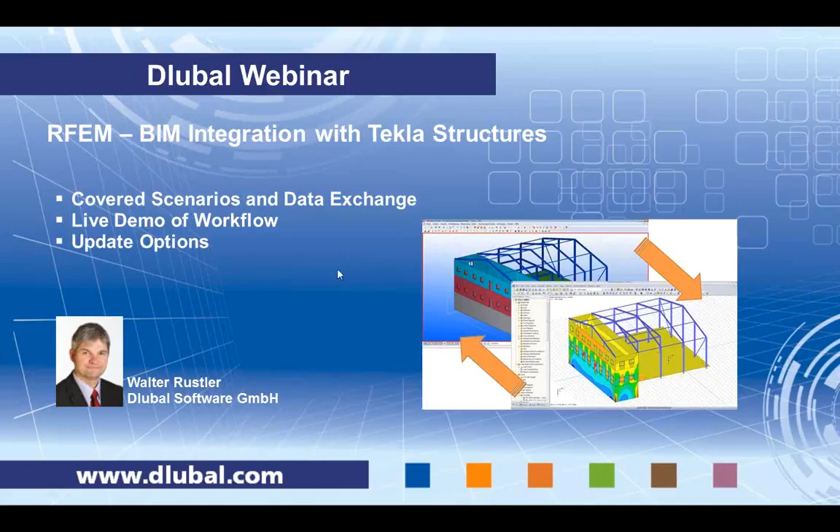So we are not limited to the generic definitions of a file-based interface, and we can pick, read and write all the properties of each object inside both applications, as long as they are supported by this API that both programs have. So in a sense, it gives us more specific options to import and export data and to directly connect the objects in both applications. It is a bidirectional interface with update options, and it works in a 32-bit and a 64-bit environment.

We can distinguish between a physical model and an analytical model, and it is important to know the difference. In general, when you work in an architectural program or a CAD application, you basically model the structure as you would build it later. When you do an analysis, you make a more simplified model that doesn't include all objects, like, for example, door frames, window frames, and other non-load carrying parts. Therefore, we have to make a difference between the physical and the analytical model.

And in general, there are some problems when you work with a physical model in a structural analysis program, because, for example, a beam might be cut off at the edge of a column, and therefore there is a gap between the center line of the column and the end of the beam. So in the analytical model, we have to overcome this gap and provide a connection, basically bring together all load-carrying parts in one structural wireframe model. And it's a mechanically correct model that includes 1D members like columns, beams, or bracings. It may include walls, slabs, or other surfaces.

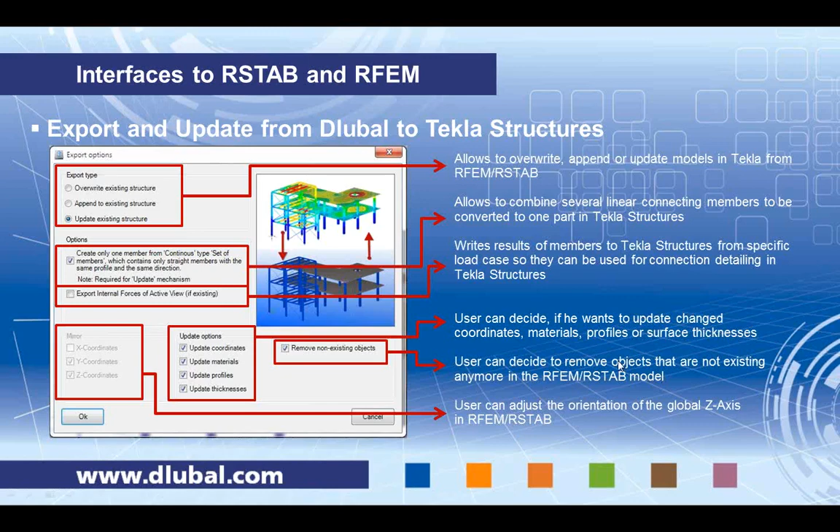Additionally, we transfer information like the node numbering of the Dlubal analytical nodes or the material or set of member numbering. So you can find the parts that you see in RFEM also in Tekla Structures. By inquiring the objects, you will find there, okay, member number 235 in Dlubal, this is what I have here now. And I can go to the Dlubal model and see, okay, where is member number 235?

All those user attributes can also be displayed on a drawing, for example. So it would be a good way to use it for an overview plan that displays the numbering of the structural objects maybe, or whatever you need it for. Anyway, we can update the Tekla model with grid lines, with information about the used materials, and also the node numbering, and additionally comments. That means I can write there, for example, this is a new beam, and then this comment will be also there as a user-defined attribute, which you can use then for filtering inside Tekla and so on.

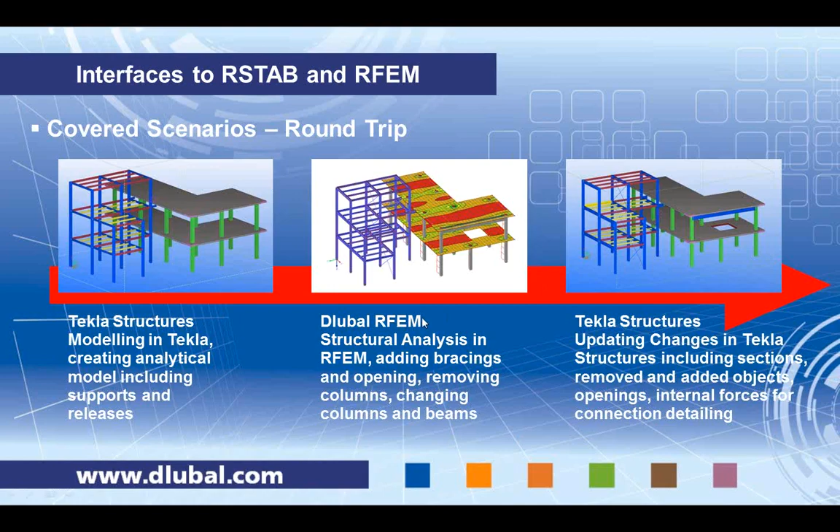Another option would be, and we will see this live in a few seconds, to start modeling inside RFEM. RFEM has great modeling capabilities as well, or you can retrieve a model from other applications, and we do the structural analysis, but there is no Tekla model. But somebody would like to have a Tekla model from what he has created inside RFEM. So we can just export it and create also a Tekla Structures model from scratch.

The advantage of this is that, for example, you are a draftsman or a detailer, and you need to know which cross-section is used for which column, for which beam. If there's a simple model you can read it, but imagine there are 1,000 members and 500 different cross-sections, then it's not so easy to even know which cross-section is where. And if I'm a Tekla detailer, I might want to work inside Tekla, not so much inside the RFEM viewer. So I can use my well-known tool to get this information and to communicate it with somebody else, or to use it for even detailing and modeling.

All in all, it is all about saving time, increasing quality and productivity, and this at the same time means also avoiding errors, and you have, I think, very well matching tools here with RFEM and Tekla Structures.

The next will be the live demonstration. We will do this 3D building here and import it from Tekla Structures. But before we do this major structure, I'd like to explain a little bit the options you have inside Tekla. I would like to point out that I'm not a Tekla expert, but I can show it a little bit.

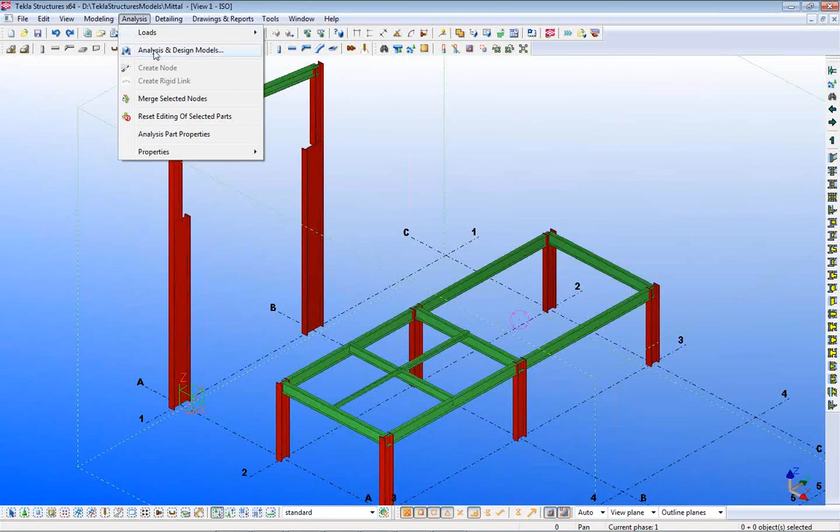The special thing about Tekla is that it has an analysis and design option here. I start this, and I have prepared already a few models, and I can, for example, show when I select this model what happens here. I get a display of the actual analytical beams, and we see here, for example, everything is

modeled by the center lines of the columns. So the statical model is in the center line of the physical model, and because of this we have here an offset, and this offset is closed by a rigid link, which is shown there in blue. This is done automatically by Tekla, more or less.

Then we have here the beam on top of the frame here, and the analytical line is in the center line of the top flange. So it is important because you might want to have the correct column length or the maximum column length, and if I analyze it in the center of the beam here, then I would lose maybe half of the depth of the beam and so on.

And maybe if I have a wind load there, the wind load is not big enough. So how can I do this?

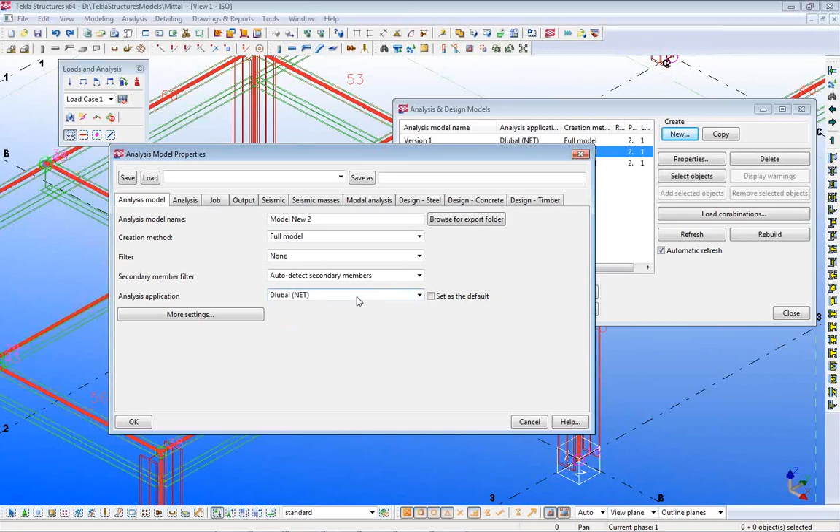And here we have a Dlubal.net plugin, which is installed automatically when you install Dlubal after Tekla is installed. So during the installation process, Dlubal looks for Tekla Structures. If it finds it, it will automatically install this plugin, and then you can select this interface. There might be other interfaces here listed in Tekla to use.

And then we have more settings, and in those settings we can set up the reference axis, member axis location, and this is an important thing. Now it's set up as reference axis eccentricity by neutral axis. I can also use, for example, the neutral axis.

If I do this and click OK, you see what happens. All the analytical members are moved to the center of the physical member. Because we have a different depth of the sections, we have the problem that the center lines do not meet in one point, and Tekla automatically creates so-called rigid links.

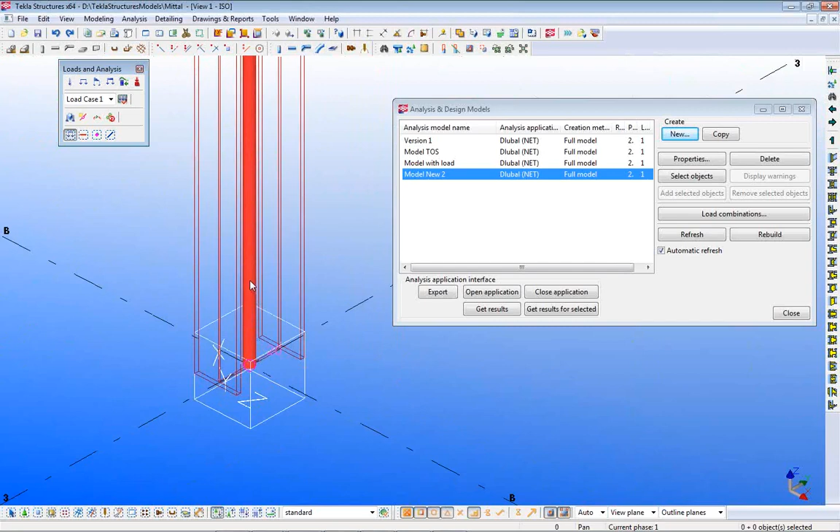Also inside Tekla we have, for example, support conditions symbolized by a white block here. If I edit the member here, okay, let me see, to edit it, okay.

It's possible typically to, maybe I have a filter which is not, yeah, I'll show this later to you. We see here that there are numbers for beams and for nodes. We see here the supports. We see here how the physical model changes.

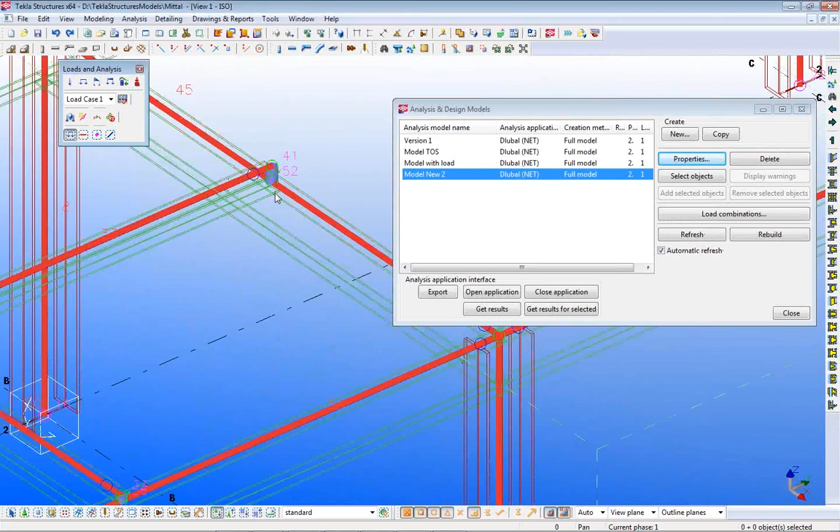If I change it again, for example, to not neutral axis, but reference axis, it is rebuilt automatically, and you see other placement of the center lines.

So let's say I want to change something here, not globally but locally. For example, here I would like to say this analytical object here should not be on the reference line. I can change it, and I can say here, okay, position, not reference axis, but maybe neutral axis. And I modify it, and axis, reference axis, let's see what happens.

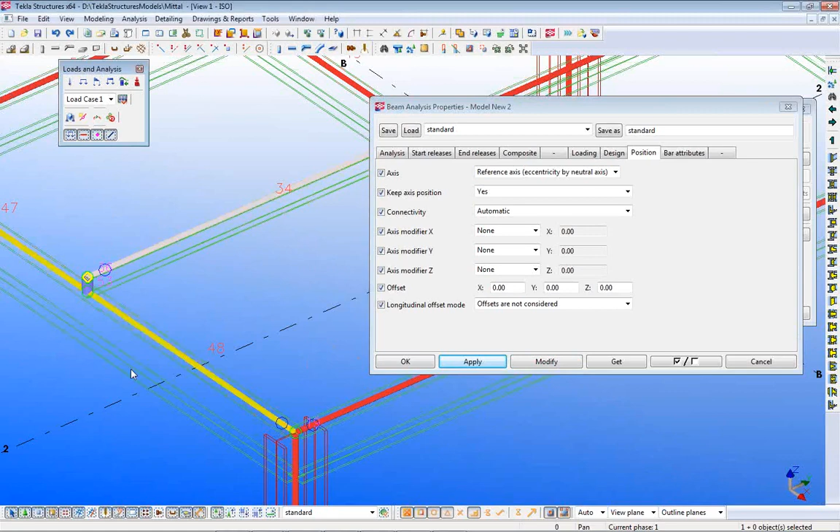I had this problem also yesterday during a demo, and then it worked, but never mind.

You can do it individually or globally, so all the offsets are changed, or you can do it member by member. Let's take a look at the support conditions. If I click on the column, you see here the start release can be a support, a pinned support, only connected, or you can have free definitions where you can enter spring constants. The end release is only connected, so on top here we have no connections. Same thing for the beam.

I click on it and say the start release is connected. We see here a release, and I see a circle. If I do not want the release and want it fixed, I modify it, and then it's changed. So it is possible to individually adjust this analytical model.

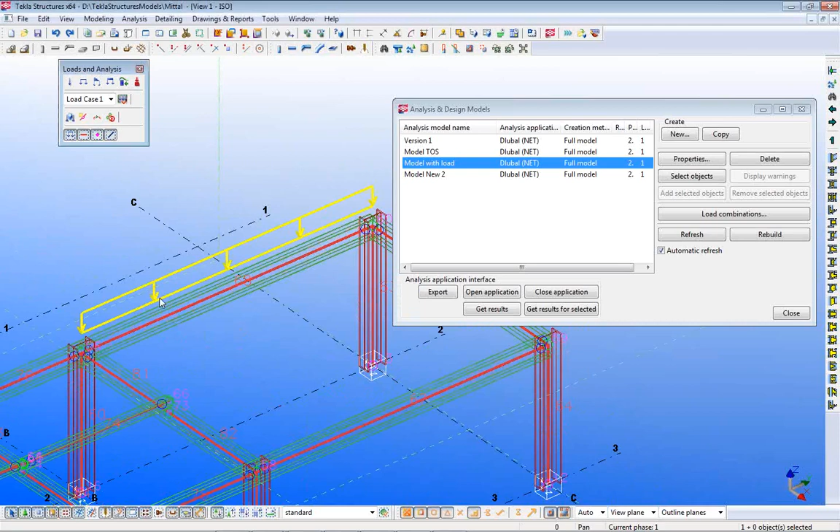I open another model here. We see, for example, there are also loads. I can display the loads basically here. You see here there's a load inside Tekla Structures where we can apply the magnitude of the load, and this is also possible to implement inside Tekla.

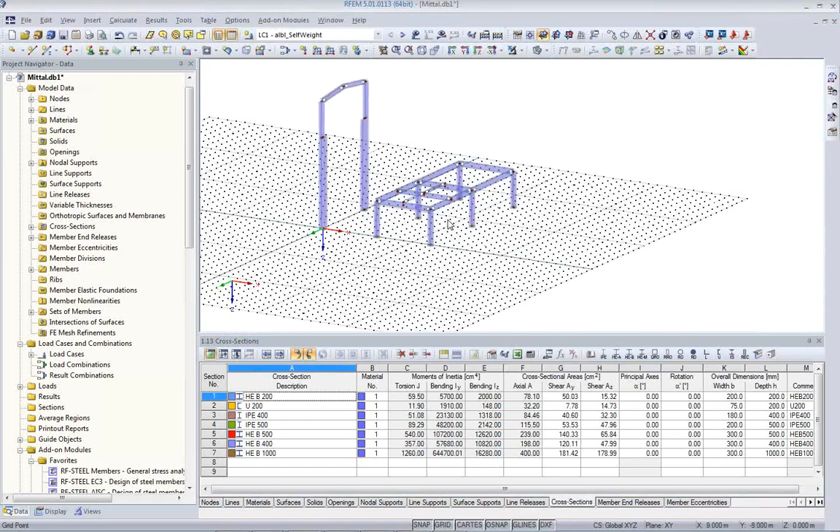So now I use the model with the load, which I'm just displaying here. I click OK, and there is a little bit of a protocol that goes through, and then I have my structure inside RFEM. We also see the load is here, and if I go to the wireframe display, we see we have rigid links and the offsets that come from the Tekla Structure model.

We see here also the support conditions are here that we can use, and also the columns have this offset here. So this is how you can set up your model inside Tekla Structures, change it, and already prepare the structural model inside Tekla Structures.

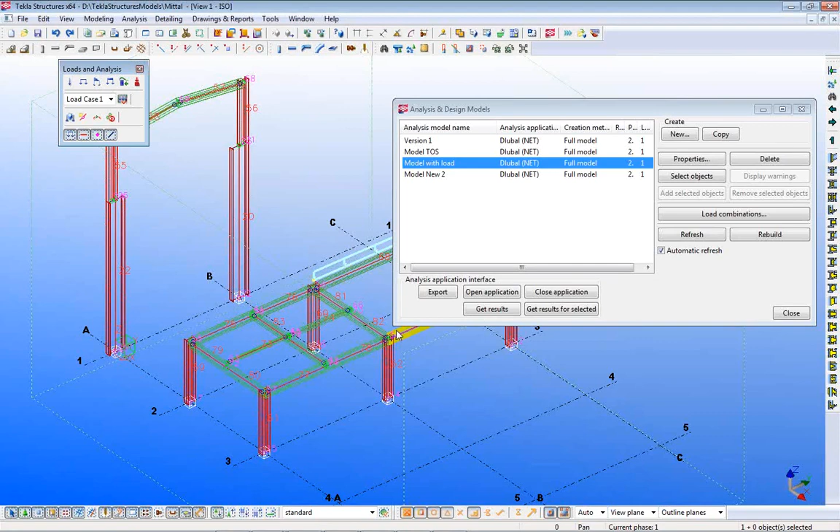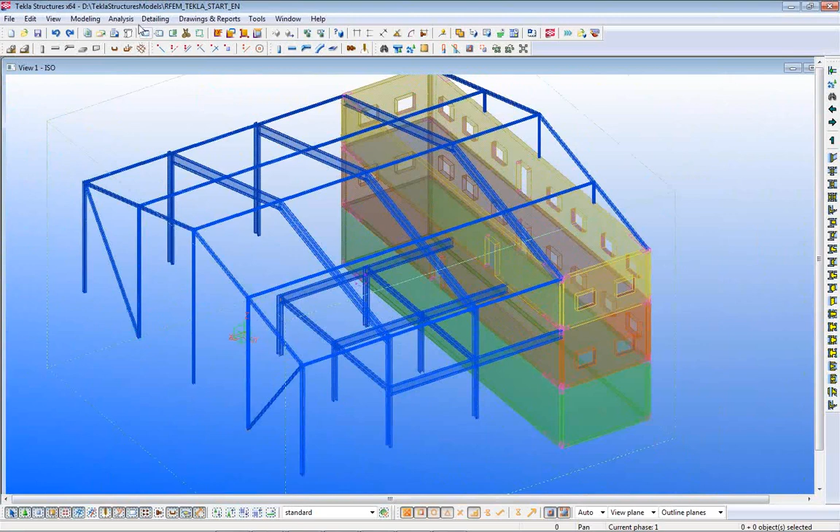Now I'll use the more complex model that I have prepared, and I open this inside Tekla Structures. This model includes not only beams but also slabs and walls, including openings, and I prepared several models inside already. You see here it's a hall including a second level, and there is a basement including some slabs with openings, windows, and so on. Inside this model I have prepared already the analytical design model.

Actually I've prepared several models. I have prepared, for example, the concrete part, so I only get the concrete part here. I can quickly import it here - concrete, and import the analytical model. I don't want to load this time, just the concrete part.

So even though I have a 3D model in Tekla Structures, I can load only part of this model, and I can say, okay, now I don't want even the 3D concrete model. I want to have maybe only one floor or one slab in the first level. So I have just one slab here that I can work with, so I can do a simplified analysis. The same way I can say I want only one end wall, and do a 2D analysis of this end wall, for example.

If you want to, you can import only one beam. Please note, here's two analytical members. Inside Tekla we have one part. When I update it later, it will stay one part inside Tekla.

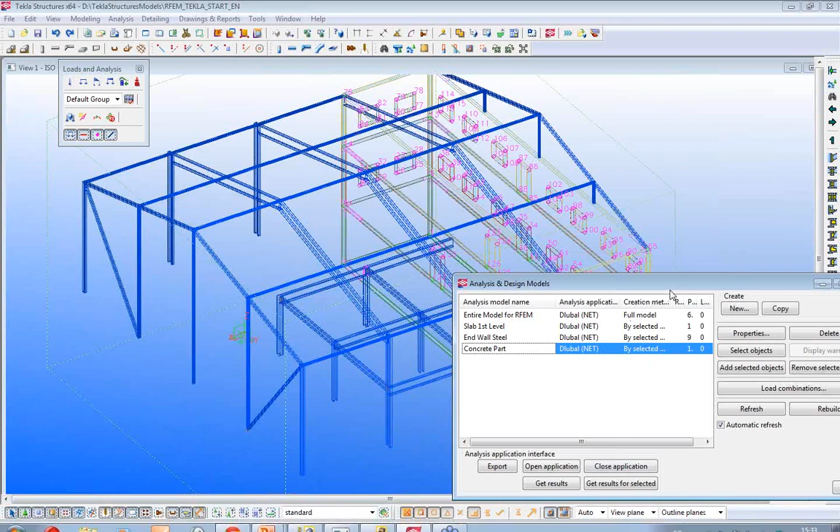Okay, but actually I want to have the entire model. Maybe I explain a little bit about the entire model that I have done in Tekla Structures. Here we have support conditions, which are pin support. We have set up releases already at the ending of some beams here. We have openings.

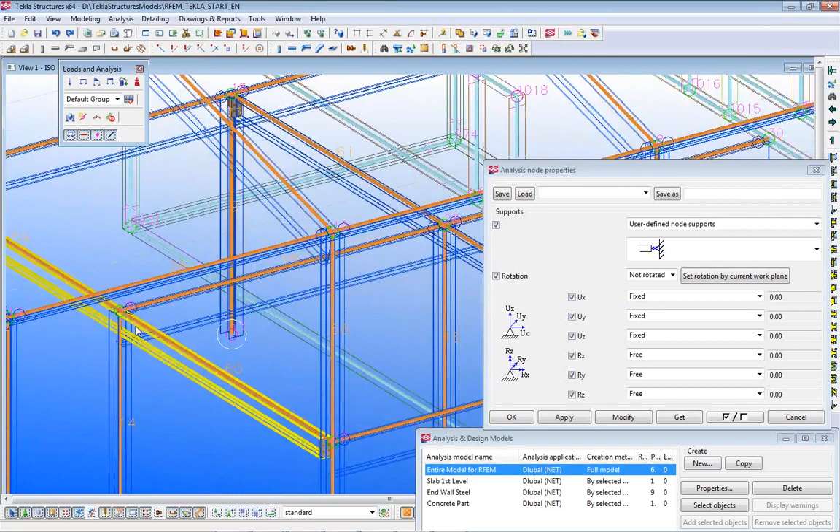I've made the model in such a way that those beams here are modeled as top of steel, and this analytical model lies on top of the center of the top flange. So it's one level. And importantly, when we update the sections later, even if they change in the section, they should stay top of steel.

Also here the walls are modeled as center lines, and the slabs as well. So I'm closing the model here and stay with the physical model view, and I start inside RFEM.

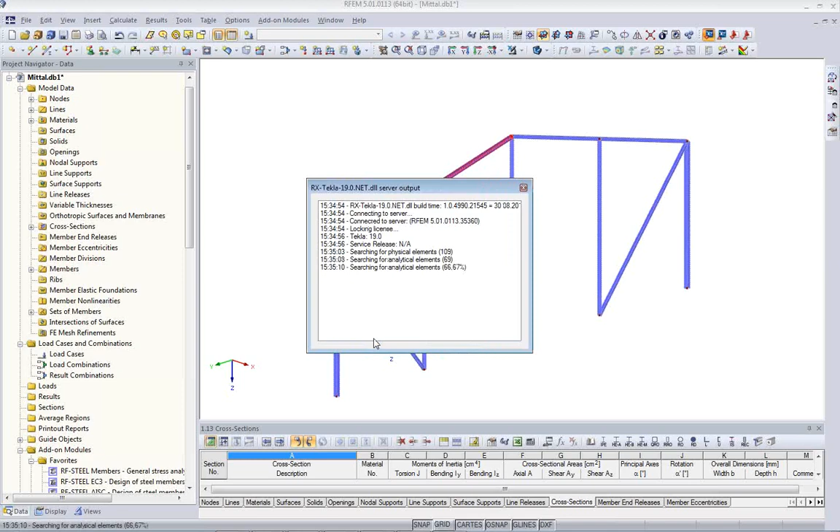I import the analytical model, including rigid links, which I don't have at the moment, and I click OK. So now I choose the entire model, click OK, and we are importing the entire structure.

We see here we have the supports, we have a variety of releases here. We have the openings. We have also, we see it on the display that we have already cross sections imported.

When I look at the table of cross sections, I see here they are all converted from the Tekla designation, which is missing the blank between the IPE and 550, but Dlubal has a blank in there. So we internally map all these cross sections.

Also, the materials are already set up according to Eurocode, and in Tekla the material name is much more simple. We include the code. How does this happen?

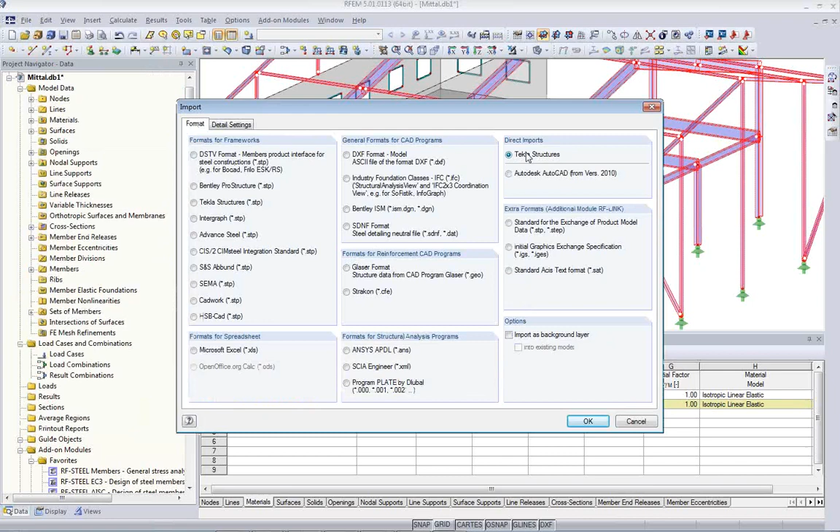When we import, we have a variety of files, of course. We use direct import from Tekla Structures, and in the detailed settings, I have the option to set up a conversion file, or I can edit this conversion file. Here, I set up which name of the material or cross-section should be converted to which name inside Dlubal Software.

So I have the option to import, export it from Excel, and I can set it up in my company as I like it for my typical materials I use. And once I have adjusted it, it will be valid all the time.

The same is for example, for cross sections. You can use this very well if you have non-standard sections, sections that are coming from different vendors. Everybody has his own designation, and for us it is basically impossible to know all the names that are existing in the world. So therefore we match the Tekla name and the Dlubal name, and remember or can now translate those cross sections automatically.

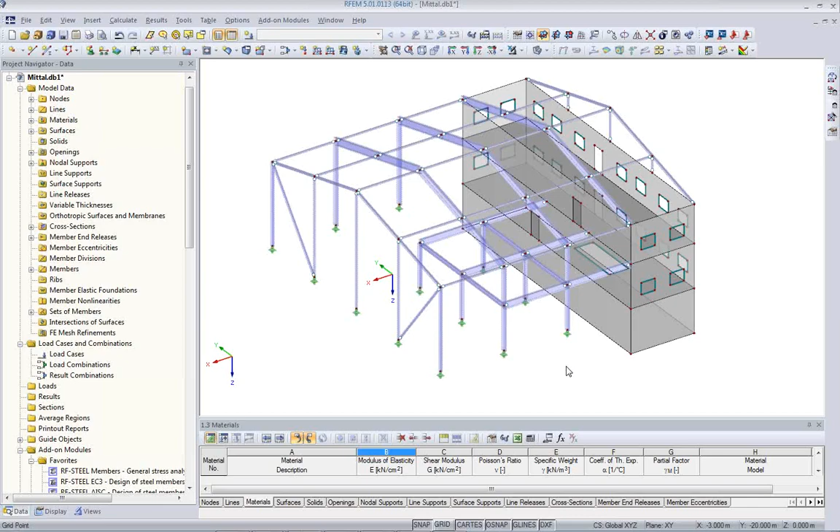So it's totally independent. First of all, I would like to know if it's really working, if it's really well connected and done correctly. So I do a first run and do a brief analysis.

First of all, I need a support on this foundation slab here, and I enter this support inside RFEM. I select a non-movable support as a first idea of this support condition, and edit the surface and add it there automatically.

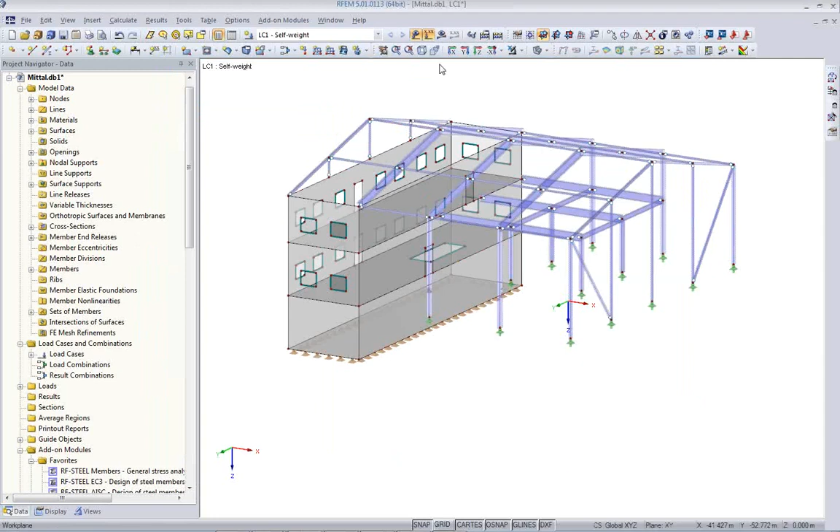Next, I need a load case to see how the deformations are, or if it calculates and if some parts are loose. So I do this simply by creating a new load case, called maybe self-weight of the structure. It will be done according to first order with a default mesh of 50 centimeters for the slabs, and we'll do an analysis. And it seems to be working.

I have here now a moment diagram which looks reasonable. I have here maybe internal forces of the slabs which look pretty okay.

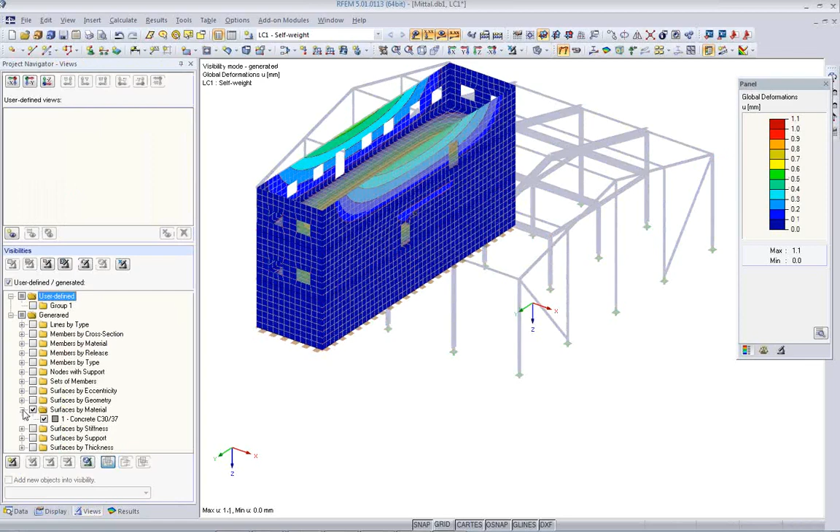I can maybe show also the deflection, maybe not now for the concrete, which is rather massive, it is almost zero, but maybe I only show the steel parts, not surfaces by material, but members by material.

So we can see here all the deformation lines of the members. I can animate them, and this way I can find if there are some loose parts usually, and it looks all good. Also, the support condition should be more or less symmetric.

Which is here at the columns, at the corner columns, and there's a little bit of difference because here we have this floor structure in here, but it looks quite okay. So my model is of good quality, and I can continue doing the design process.

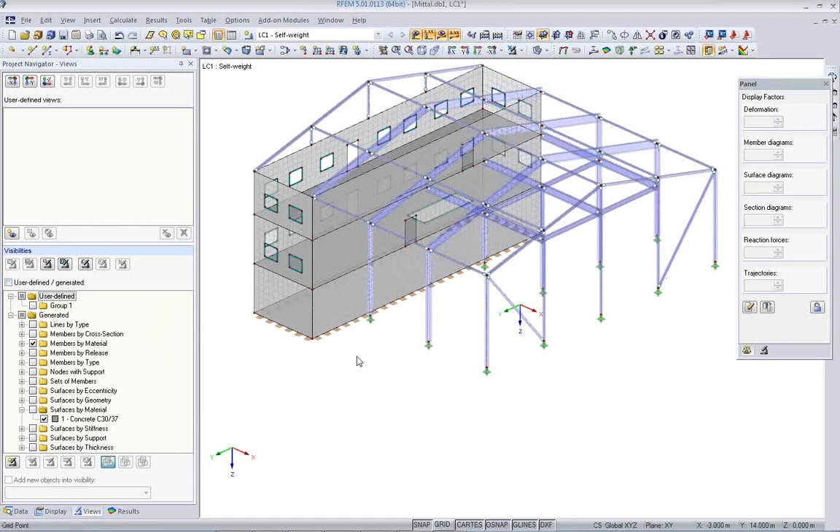First of all, I have to create, maybe I've checked another thing from the structural point of view. I need some bracings here in the roof. Typically we have some bracings here.

The first level here of the grid is supported horizontally by the concrete part here, but the roof structure maybe is a little bit unstable, and I would like to have a bracing here.

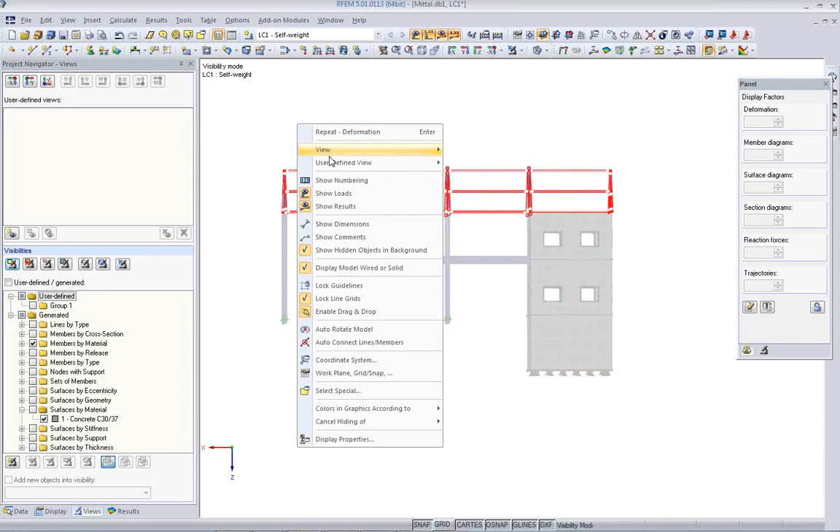Before I do this, maybe I prepare some typical views of the structure, and I select the roof, and I create a new visibility from this roof structure like this, and I say, okay, this is what I like to save, and I create a new user-defined view. I call it roof.

Next, I would like to do similar things, for example, with the floor here and the additional slab here. Maybe I can select it also like this, and I say, okay, show me only the selected parts. This is another view I'd like to save, and I say floors.

Additionally, when I go to the default RFEM view, it's displayed this way, but Tekla always uses this kind of view. If I go back to Tekla, this is their default view. So in order to avoid confusion, I'd like to save this view as well, and I write there as Tekla. From now on, if I need a different selection of my model, I click on here and I have everything I want.

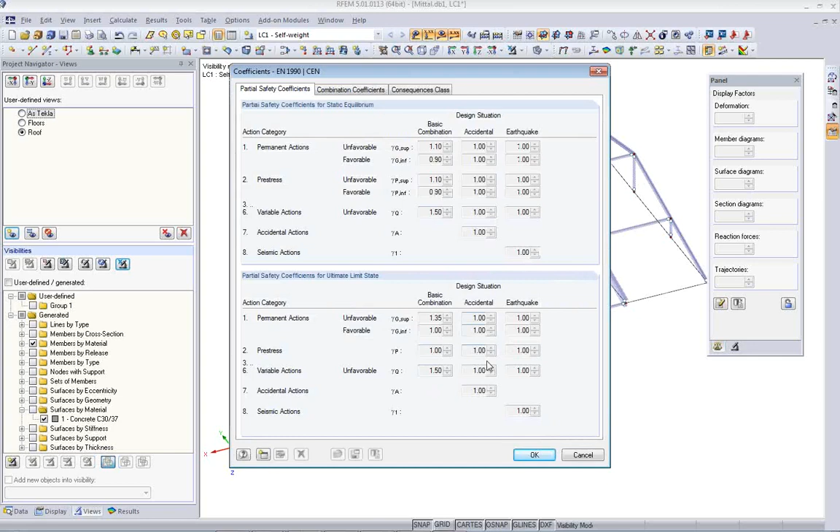Okay, let's start with the loading. When I go to the general data of the model, I can set up to do the load cases and combinations according to a certain code. I'll use Eurocode for this. I have here the various national annexes. Because we have international audience today, I use the general Eurocode settings, which are available at the detail settings, and we have here access to partial safety factors, combination factors, consequence classes.

Once I do this, I can also create combinations automatically. We stay with a 3D model. The advantage from now on is all the loads I enter and all the load cases I entered are classified according to this code for snow, wind, and so on, and the software knows automatically which combinations to create and which combination factors to use. I can do it most comfortably in the tables, which I can display or hide, and next to the model data, there is the load cases and combination data.

As you've seen or heard also, there is an automatic combination done, but as soon as I change the load case setting, and it doesn't make regular sense to have combinations with just one load case, it will update or delete these combinations that have been done automatically before. I create next to the self-weight a second load case called snow, and I have access to all the action categories for Eurocode. I have wind as a next load case and another load case. It's not here, I type it here, live load.

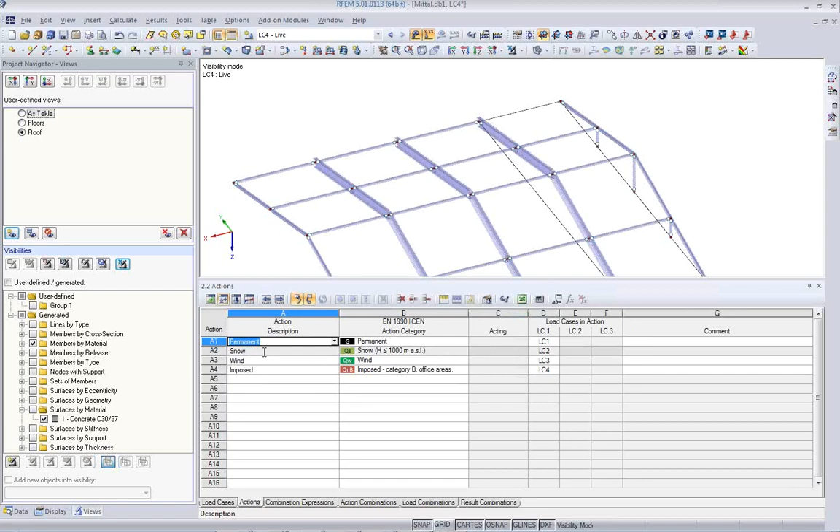And then, because it could be anything written there, I have to make sure I choose the right category, and this should be an imposed category B on office areas. Okay, I have 4 load cases, which should be enough for this demo. I have actions, which is a first summary of all the wind load cases, all the snow load cases. They are summed up in actions, and then we combine the actions. Typically we have an ultimate limit state combination and a characteristic or frequent or quasi-permanent combination.

I want to do a preliminary design, so I'm only interested in the design ultimate limit state combination. Then I do a combination based on the actions, the final combinations basically, which include the load cases and the safety factors. So now I see load case 1, 1.35. Most likely this will be not controlling. Or I have load case 3 with 1.5, which I think was wind. I leave it out because I have load case 3 somewhere with 1.5 in another combination.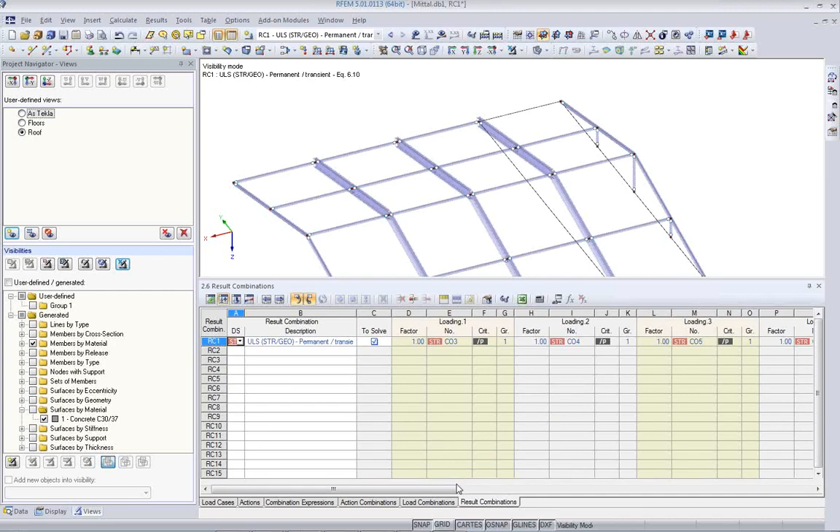So you can calculate everything, but you have a selection here of what you really want to calculate. So you do not turn off your brain. You control the software, not the software controlling you, and you also see exactly what the software actually does. Okay, then from these 13 or whatever combinations, I can have a result combination, which is the envelope of all the calculated combinations before. So I get a max-min summary of all the combinations I have to analyze. Okay, this is the combination part.

Now we talk about the actual loads. Self-weight is already here as the self-weight of the structure, but I need to add now the actual loads. So I go here to the wireframe view, and I add now a roof load quickly. It's a surface load to load case 1, and the magnitude is in this case 0.5 kilonewton per square meter, and it should be global direction, but related to the true area.

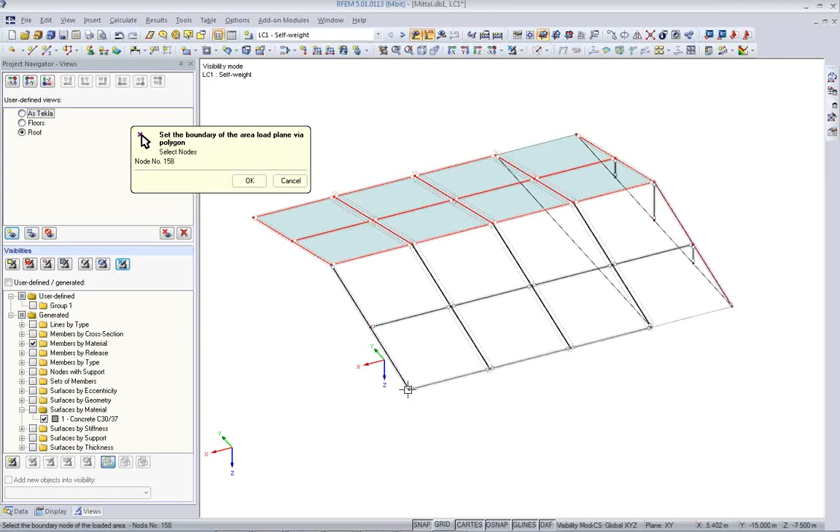So I pick my boundary nodes of the surface, and I can continue doing this for multiple surfaces. On OK, I return to the dialog, and I can select parallel members that should not be loaded. So only the red members will now be loaded. I click OK and OK again, and I get some summary and some statistics, and I see here my first area load.

The next load, our self-weight load, will also have to be on the floors. That's why I prepared this view. And I create another area load, a little bit more on the grid here, and select here the individual corner nodes. OK, and also decide that the distribution of the loading should be on the cross beams. Okay, and 2 more surface loads on the slabs, 0.5 here and here.

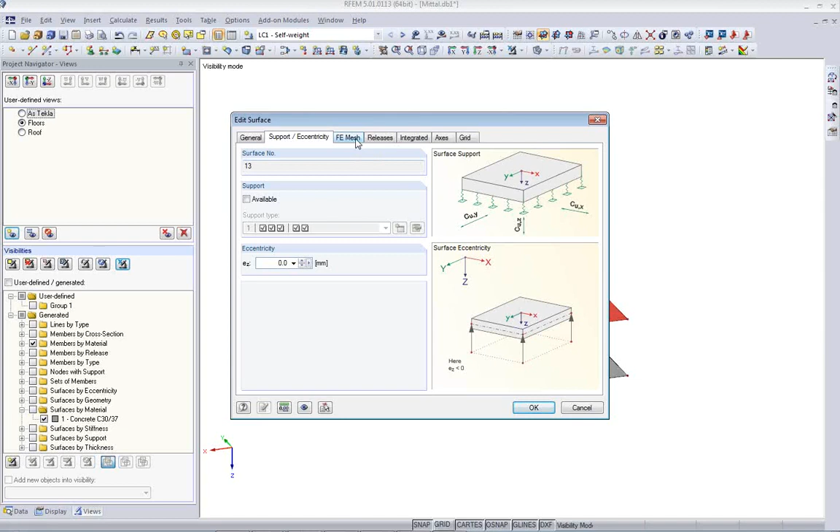While I'm working with the slabs, I remember I forgot something. Those slabs now are rigidly joined with the walls, but I don't want to have this. Therefore, I double-click the surface. I say here releases, and I add a linear release that sets off all the spring constants for moments on all the edge lines of the surface. Okay, and then I get displayed a linear release on the edge of the surface.

And the same thing I do here with this second surface, create a new release, also the same type, so there should be no moments at the edge in the wall. And here, because it does this automatically on the opening, I have no wall, so it doesn't make sense to have the release there. I can just select it and delete it. Okay, now I think I have everything regarding the model.

We've looked at the self-weight load cases, and we continue with snow. Snow is something for the roof. Okay, quickly have the roof here. And I have a tool called snow load on duopitch roof. I can use the Eurocode here. And I have again national annexes. The ground snow load should be 1 kilonewton per square meter.

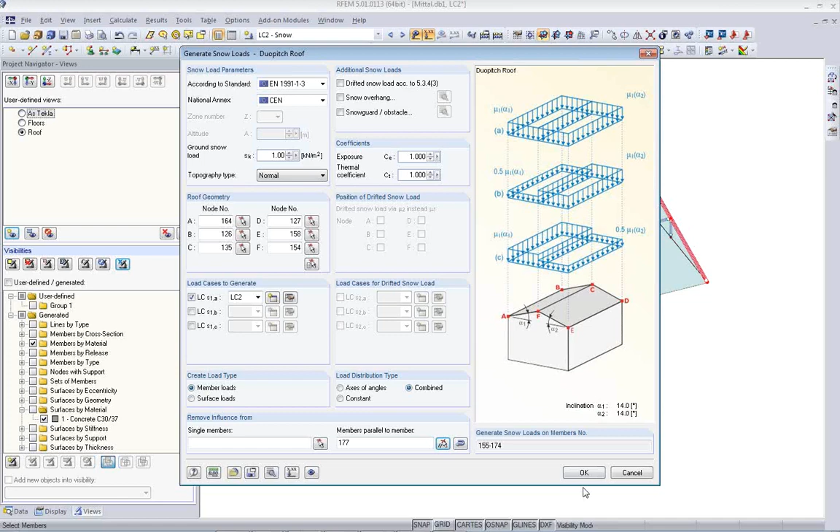And I pick now the boundary of this duopitch roof. Okay, there are 6 nodes I have to pick. It should go in the load case 2, which is snow. It automatically filters it and remembers it. And then I say again, only on the main beams I want to have this loading. Okay, I get again some summary and my final snow load on there.

Next is the wind load. Wind is on the entire structure. And I go to wind here. And I would like to have some wind in -y direction. So I add a wind load as force in global y direction, -0.5. Okay, on this surface and on this surface. On the opposite side, I have a little bit less. I create here again a smaller surface load. 1, 2.

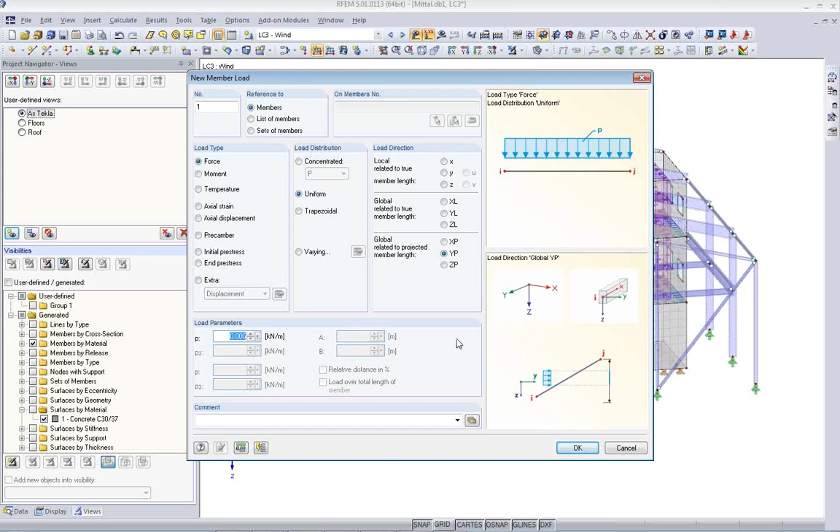I also need some loads for the columns. Member loads, global y direction. It should actually be in the projection, if it's not straight, not vertical, -2.4 as a member length, as the member load. 1, 2, 3. On the edge, there should be some lower value, maybe only half. Okay. And then here on the opposite side, again the same thing, but -1.5, a little bit less for the center columns, and -0.75 for the edge columns.

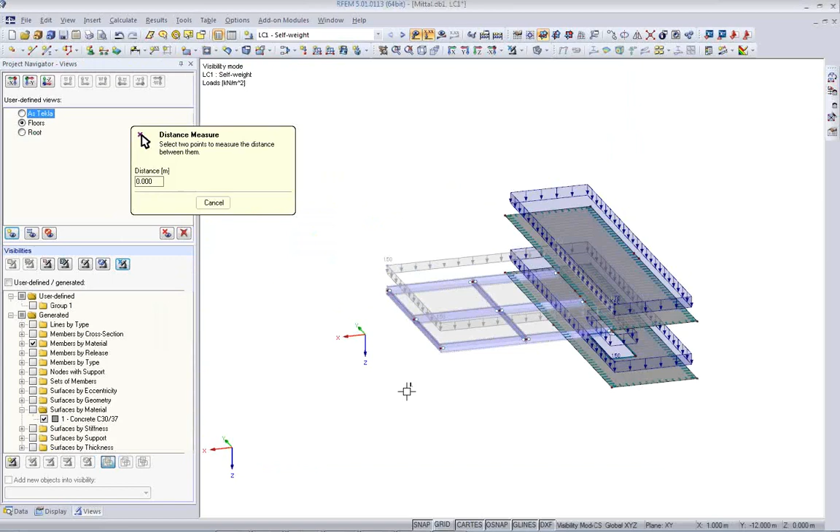Additionally, I have a wind load on the roof, and I use the generate wind load on duopitch roof function. Again, according to Eurocode, I need the height of the structure, which I can grab from the structure, and I need to select the roof points. 2, 3. Okay, one more. Wind load. Okay, I have the height.

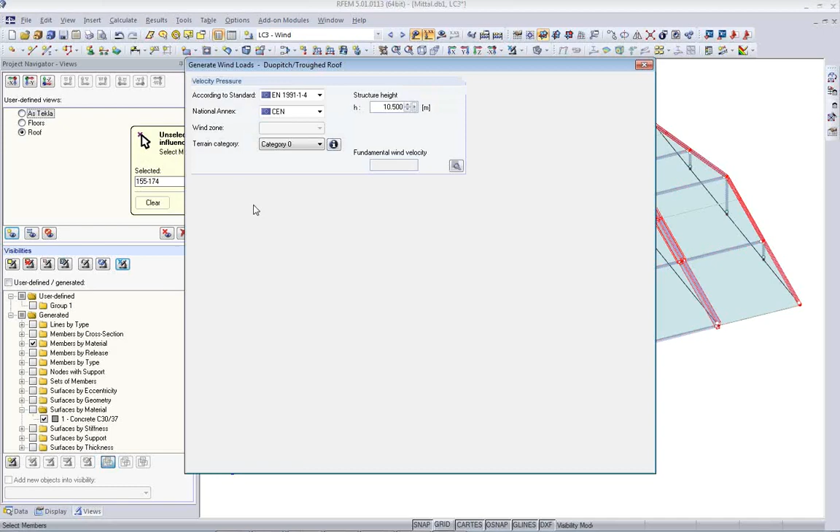Everything is fine. Now it's important to understand where the wind blows on the structure, and you see here A, B, C, D, and I use this order to select my nodes as well. 1, 2, 3, 4, 5, 6. And the wind load should go to load case number 3. And I only want it on the main beams as well. You can see in the background also the impact areas, G, F, H, J, I, as in the code. And OK, it creates my uplifting wind load.

Okay, last but not least, we have a live load on the floors, which is basically simple. We can create another surface area. It remembers the last input, so I only need to add the actual live load. Okay, and it's updated here in load case 4, and the same live load 3.5 as global Z direction on the slabs.

Okay, it is more or less complete now. Of course, I understand that wind loading can be much more complex. We need some load mode maybe that is working on the end walls here and so on. It is, I think, extra work that needs to be done.

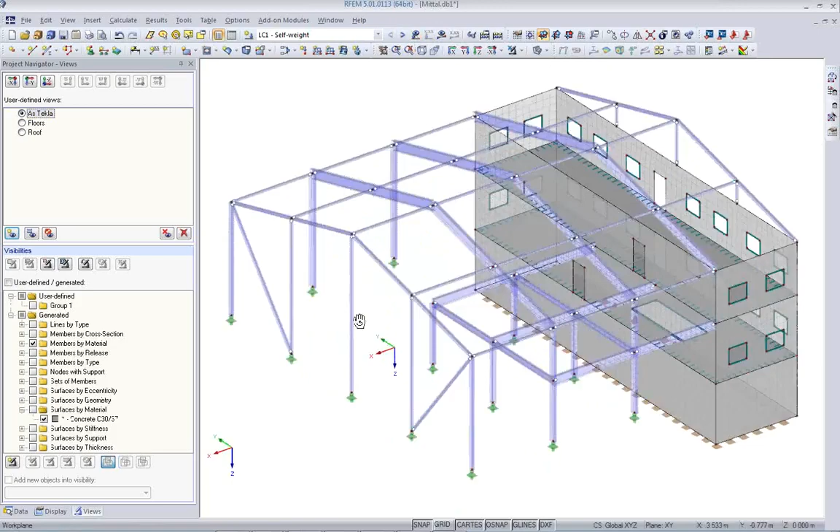For typical structures, we have wind load generators as we've seen for the roof. But for our demonstration here, it should be enough, and we will do the analysis now of this structure. Maybe before I run the analysis, I remember one more thing I'd like to do.

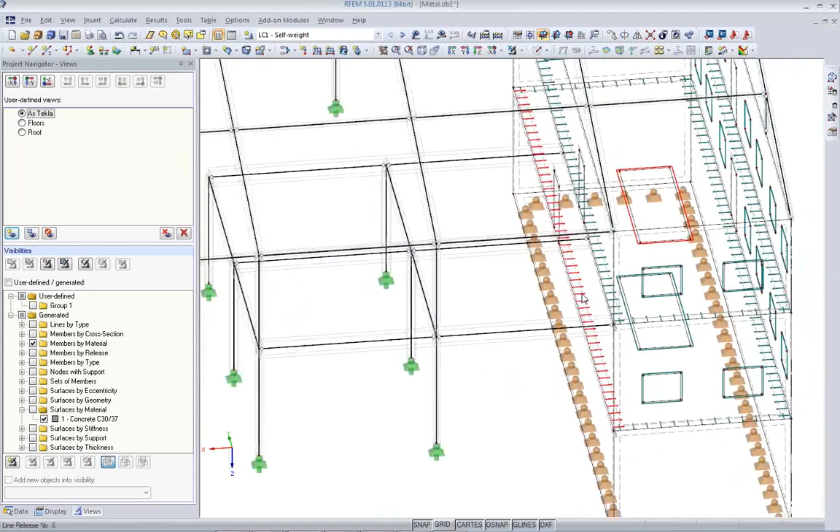I got a call from the architect, and he says, I want to have the same opening which I have in the first floor also in the second floor, because otherwise there is no way to get up there. So we need to quickly copy this opening. So I select the opening, I move copy it, make one copy, and I copy it from here to here. Okay, so now there's an opening also on the second level.

Okay, now we run the analysis, or we go to the design basically. Design is done by the additional module Steel EC3. I'll briefly go through this module. There are other webinars that already cover this module, as well as there will be another seminar covering the concrete module, which I will show in a few seconds as well. But I will not explain now all details, because we want also then to exchange data with Tekla. Now we go to the RF Steel EC3 module to optimize some of those sections.

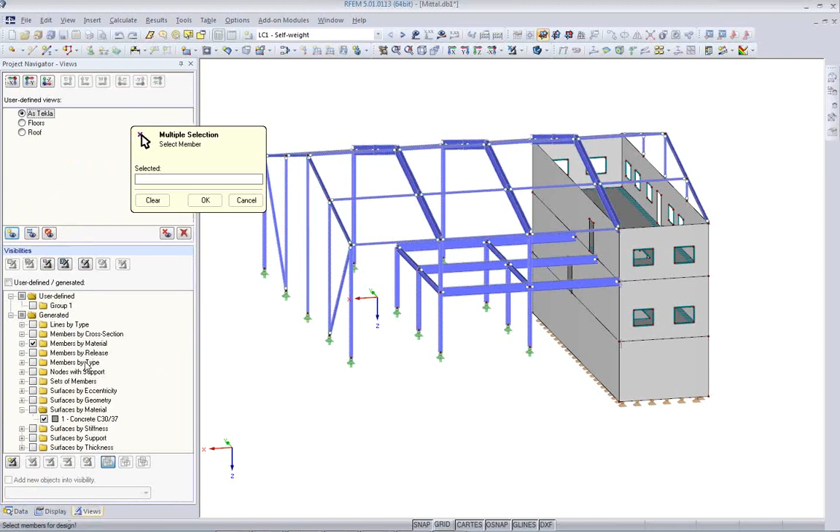We have Eurocode design, we have here also national annexes, and I select a series of members I'd like to design. Here I'll use the Views tool again to select, for example, members by material. So I hide all the concrete stuff which has nothing to do with EC3. Also, I can do similar things like members by cross-section. And if I open here this filter, I can say, please do not show certain members. I don't want to see those.

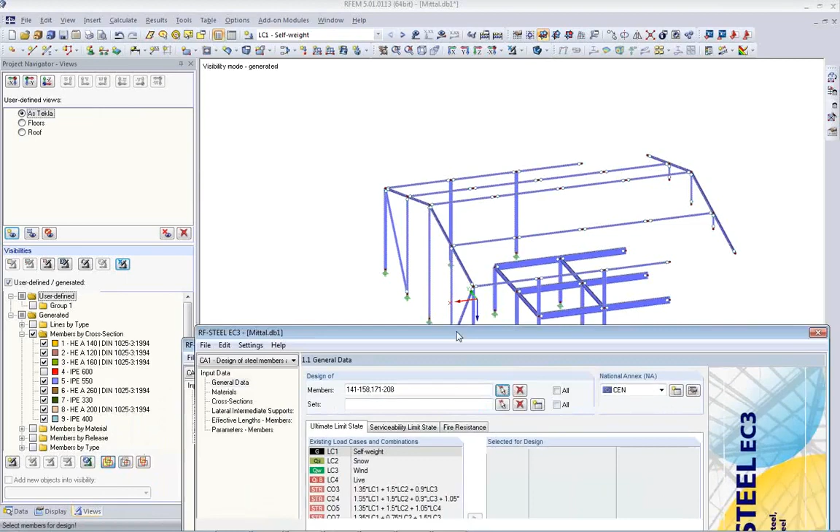This has a reason, because those main girders I will do in a different design procedure, but those will be all done as members, because all those members have design lengths equal to member lengths, with the exception maybe of the columns, but we'll neglect this in this case. I select for design the ultimate limit state combination that I have pointed out before, and now I'll select also the set of members. Clear. I select those main beams that are here, which are 6 main girders.

The design length of these main girders is the entire length from the wall to the pitch of the roof, and it has a local support which is supported by the bracing, which I forgot to enter, in the center. So the buckling length in the weak direction of the cross section is smaller. I can select now in the stability design that I want to use the equivalent member method, or I can use also the general method, but the equivalent member method is maybe more simple in this case, and is the more general option that typically is used, and that's why I selected it here.

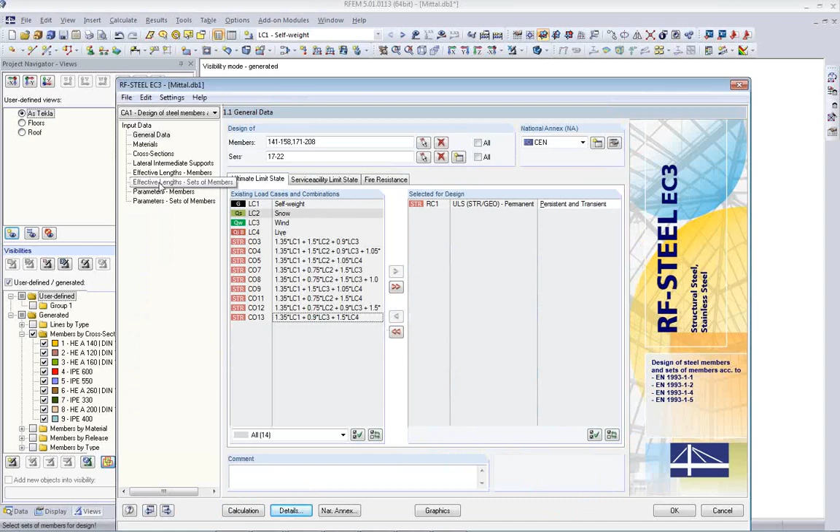We have the materials, we have the cross sections that are imported now from the structure. We have lateral intermediate supports for members, and we have effective member lengths, and effective member lengths for set of members. And here I select the factor 0.5. So about the local axis z, which you can see here, the buckling length will be only half of the actual member length. And with the use of set of members, I can handle this very comfortably. Otherwise, I have the option to take into account rotational restraints from a steel deck, for example, or shear action also from a steel panel, which is, of course, increasing the stability of those beams. Okay.

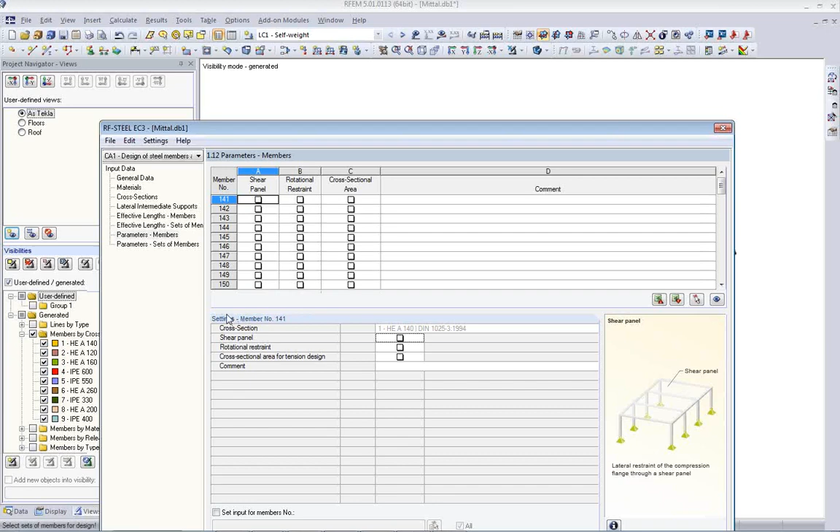Before I run the analysis, I go back and I will enter the bracing, which I forgot. Let's go back to the roof. I have a tool that quickly allows me to add bracings. Tension only members. I create a new cross section, which I can just enter here, and I can select steel as the material. Now you can go either to the library to pick it, or you can enter it manually. If you know the name, it will automatically read it from the library.

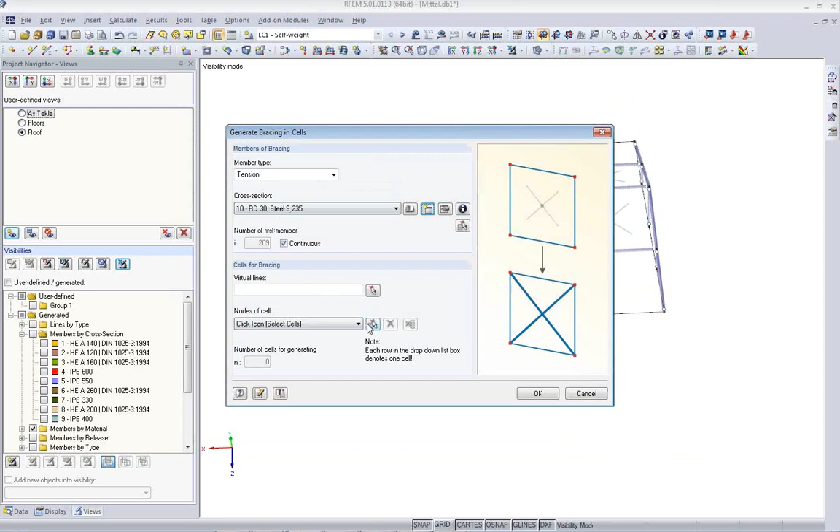Okay, it's tension only members, and now I can just select the bracing crosses here. The software finds automatically the enclosed cells and gives me a symbol, and I can select those symbols. Otherwise I would have to manually enter all those beams, which is more complicated, and quickly I've created my bracing here. Okay, here we go. We have the entire model, and now maybe we have to talk about concrete as well. Let's design that as well right away. Concrete surfaces.

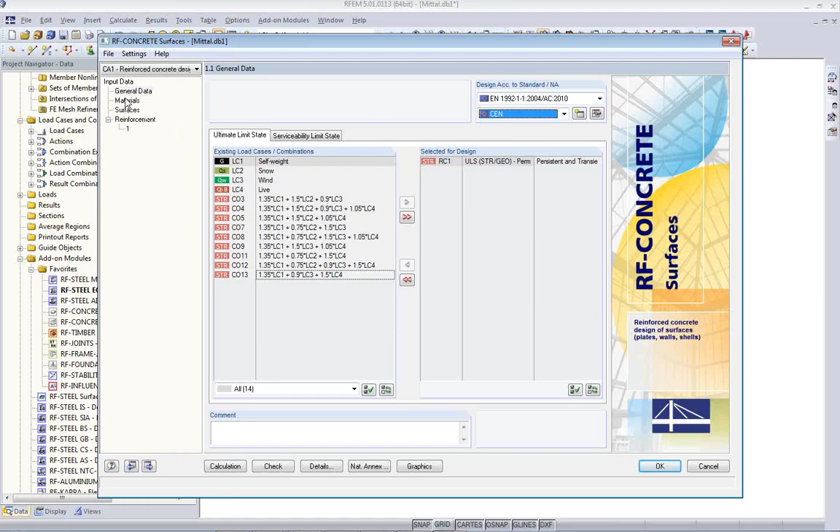We go to the surface module, and we also want to design the result combination 1 according to Eurocode with the national annexes for the general settings. I have the materials as well here, the surfaces, and the reinforcement settings. I don't want to investigate all surfaces. I only want to have my 2 slabs.

Okay, and here I need to talk about the concrete cover. I want to do it according to standard. I just select the exposure class. Now let's stay with XC1, and I get automatically the required concrete cover. I can do a provided reinforcement that I decide to enter there anyway, on top and bottom to avoid cracks.

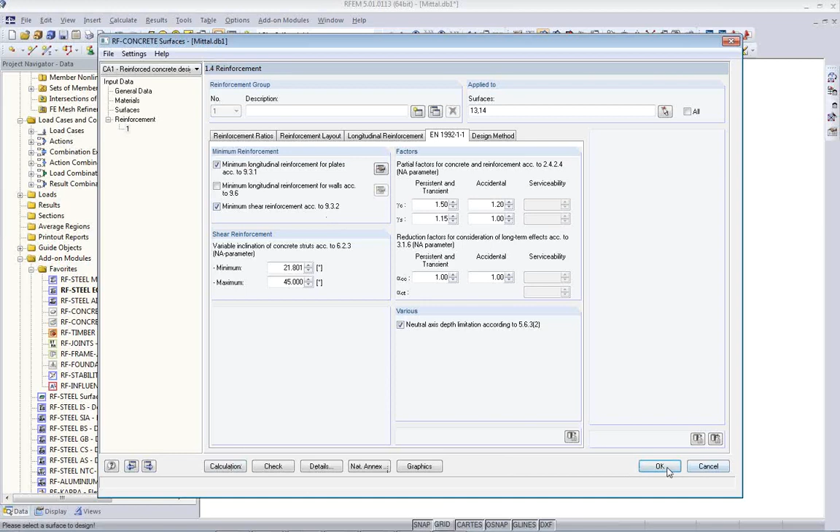There's also an option to analyze the crack width and so on, but for my preliminary design, I say I want to have this wire fabric here, and I like to check the minimum longitudinal reinforcement and so on. So this is it for my settings, and I think now I can just calculate everything. Calculate all.

Now RFEM will calculate all the existing load cases that I have selected for calculation, and I hope everything is going well. I haven't checked it with the real loads, only with the self-weight loads, and it will take now a little bit. It's a nonlinear analysis. I can set up that combinations are done linear or nonlinear. Typically it's linear for load cases and nonlinear second order or P-delta for combinations,

and we use now a nonlinear analysis, which is taking into account the additional moments from deformations. So equilibrium on deformed structure is maybe the important sentence to say here. Okay, after a little bit we will get hopefully the results. Combination 12, and I think we have 13 all in all. So there are several iterations because we have failing members like the bracings, and also we have the second order iterations anyway.

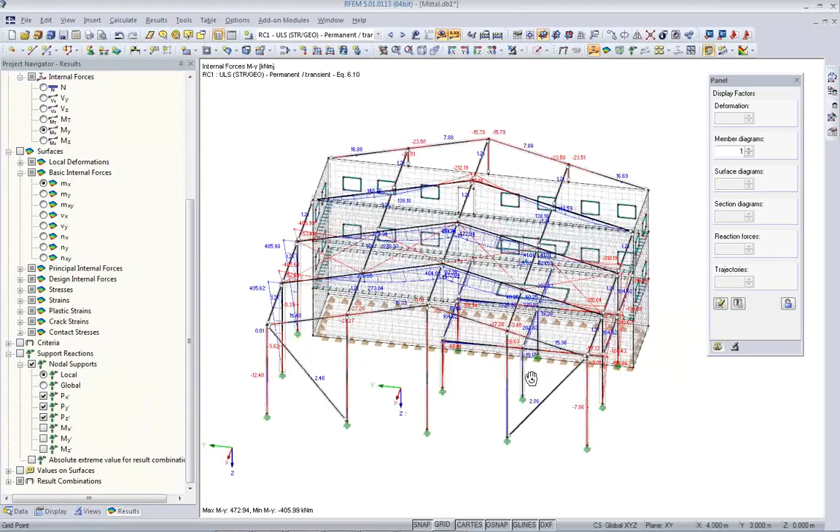Okay, now we go to the concrete and the steel design, and we get finally some results. Okay, let's take a look at the results maybe for the internal forces. Result combination 1. I go to the wireframe display, and we see here bending moments, for example. From ultimate limit state combination, we can set up here axial forces, bending moments, strong axis, weak axis.

Looking at the weak axis bending moment, I see here, I don't like to have that. Maybe there's something wrong with my orientation. Yes, I have a frame here, it's a moment connection here, and it goes into the weak axis of this column, which is not good for design. So probably I have to change this. I remember this and do this then later.

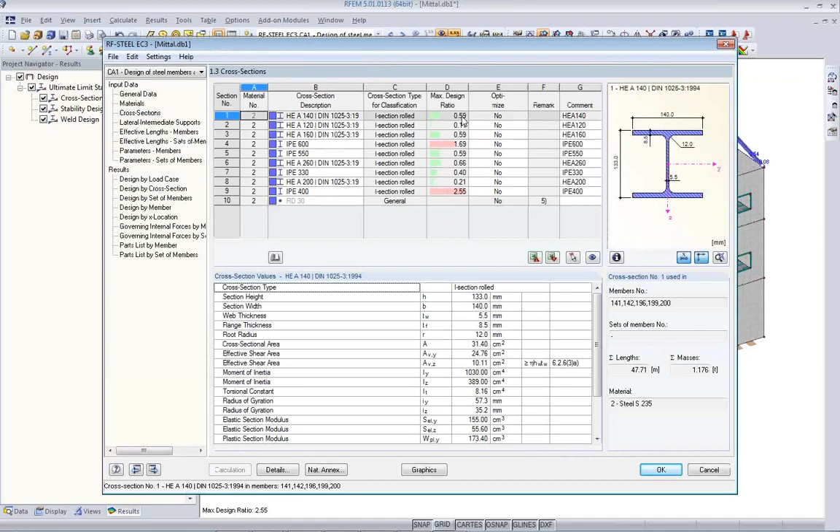Let's see what we get on stresses. Steel EC3, ultimate limit state, design ratio is 2.55. Let's see which cross sections are a problem. I go to the cross section table and see here, okay, there's a problem, not a problem here, not a problem here. These seem to be okay, but these main girders are a problem. Then we have the cross beams here, which are pretty okay.

And I'm missing, actually, now here they are. These are the main columns here, which are not so good. We have IPE 400 here, and it's no good. So something needs to be done. Probably it would be a good idea to have here an additional column, and also maybe to support these main girders here. Some design considerations that maybe are done while the structural engineer is doing his job.

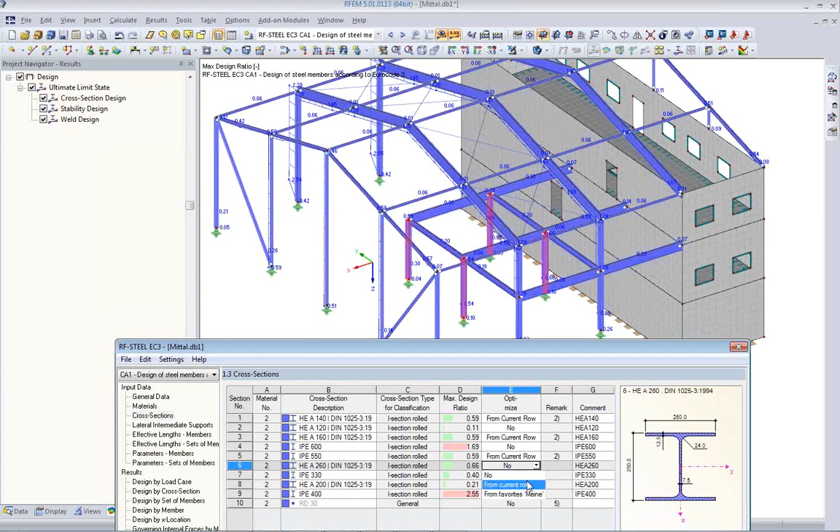Also, maybe I'd like to optimize those cross sections, and I optimize them from current row. This means I don't change the type of section. I use a HEA, for example, and I stick with an IPE here. And this I want to change anyway, so I leave it. Those main girders maybe can be smaller, so please pick another one. Then we have here the columns, which I need to change, but anyway, I'd like to set them up for optimization. I also want to optimize those, and my main columns I want to optimize as well.

I run the analysis now only in the steel check. So I rerun the analysis here, calculation, and see what I end up with, with the internal forces that I have now.

So it picks an HEA 120 for the corner, 140 here, which sounds reasonable. 500 is okay. We have 240. Okay, let's stick with it. 240 instead of 330 here, and this is 600, so there's nothing to be done.

But now the blue cross sections are optimized, and I can export them to RFEM to update my internal forces. I do this now because I already have a better idea from these cross sections. Okay, they are updated now from the initial design, and now I'm doing my model changes additionally.

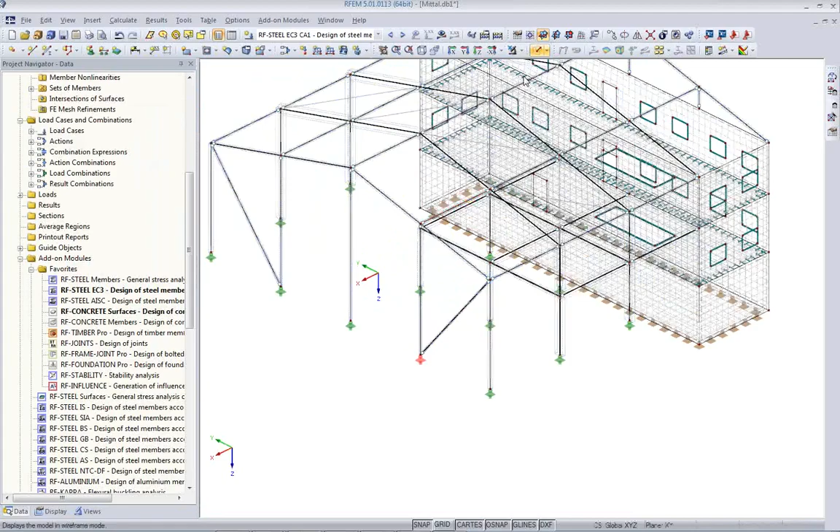That means I want to have a column here. I pick the type of column from an existing beam, so I have the orientation and the cross section correctly. Say okay, from here to here, and the same thing from here to here. Also, I'd like to have this little column here of the same type. I copy it, make one copy from here to here. Okay. So everything seems to be reasonable.

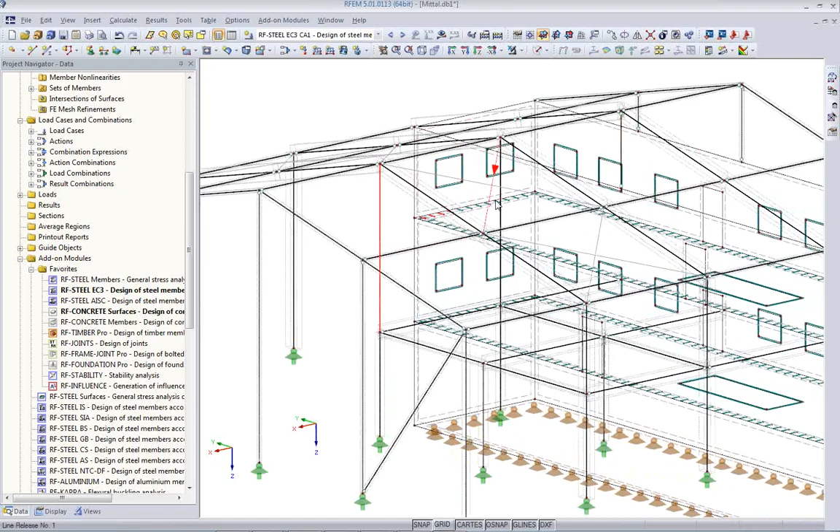Now here on the top, I want to have an additional member release, so I have an easy connection up here. At the other end, I cannot forget to rotate my columns here by 90 degrees, so they are carrying the moment in the right direction. Voila. With this, I go back and run my analysis of Steel EC3. I just click, please show me results of Steel EC3, and RFEM will automatically update the results.

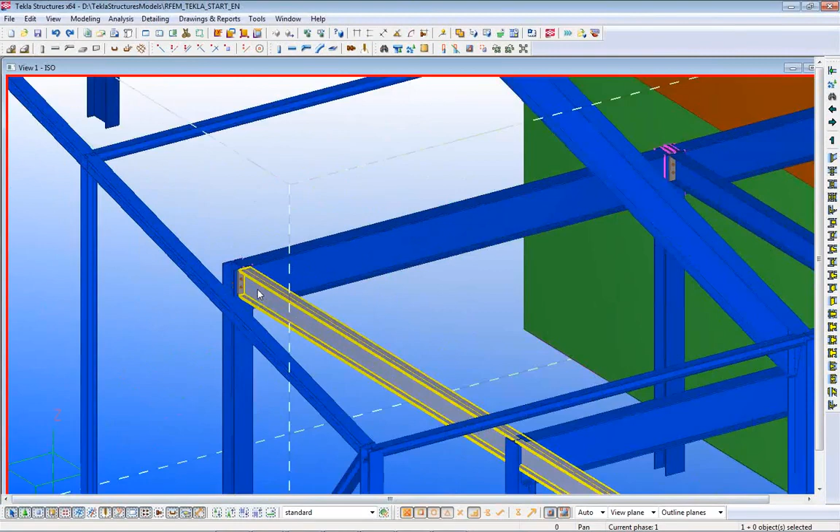So this takes another few seconds, which allows me to explain something more in the Tekla model. In the Tekla model, I also have connections already. So the connections may be done while the structural engineer works on the design. And the connections are here. It's a very powerful feature of Tekla Structures.

You see here connections are there. We see here also that these parts are one part, one beam. This is one beam. These columns are one part. So the analytical model is a different model than the structural model. Let's see what RFEM does. So we have a nonlinear analysis here.

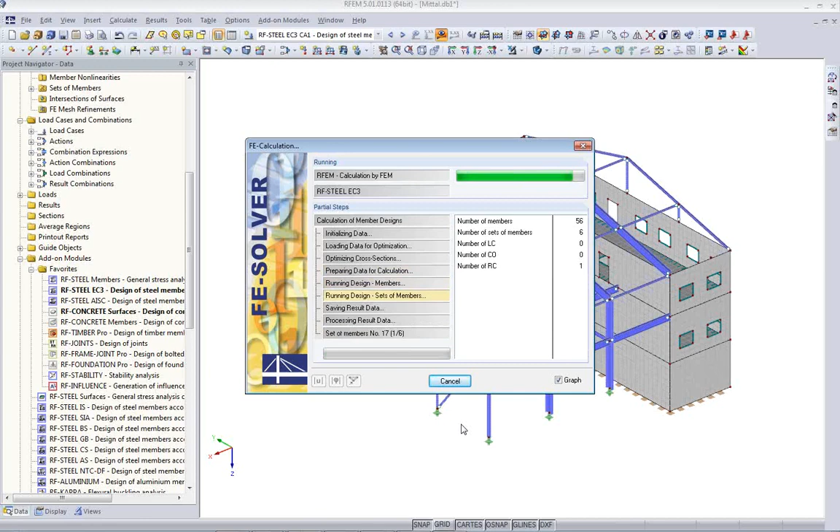And okay, I think I'm running into a slight problem here, which I need to close and see what happens. Okay. We have combination 11 now that is analyzed, and then we should get some result. Okay. Now we get into the analysis of Steel EC3, and we have a design ratio of 95%.

We open the Steel EC3 module, and we see the utilization ratios are quite okay. We are back to very low utilization of the main beam, IPE 600, which is the column here, which is low. Then we have 600 here. So we could optimize much more, but we have some changes in the cross sections.

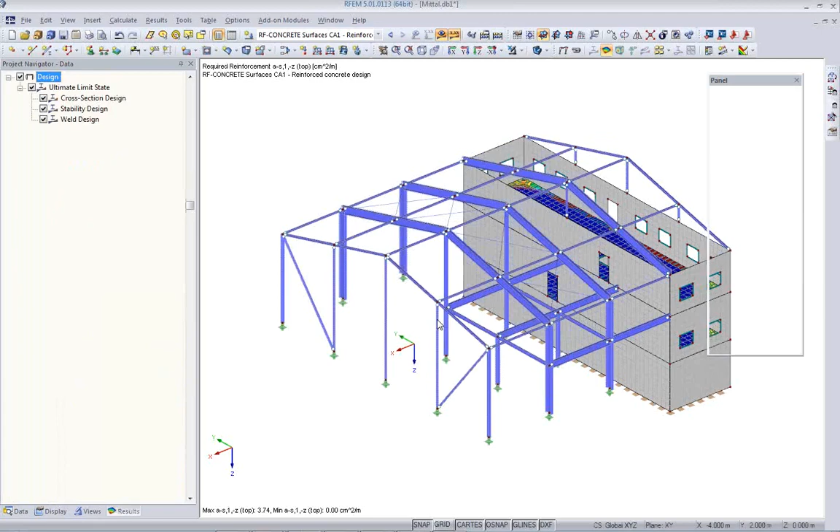Let's have a brief look at the concrete results and do the concrete analysis. I can use my view again, floors. Okay, but I need the results here, concrete. We see top reinforcement in one direction and in the other direction. We see bottom reinforcement in two directions.

This is the required reinforcement, and we can show the additional required reinforcement. So I have a basic reinforcement, and everything above this is shown in different colors. So basically you put your wire fabric in here, and you put the additional reinforcement where we have the colored parts. Okay, my design is done so far. I'll keep my results here, result combination 1. And we can now update the Tekla model.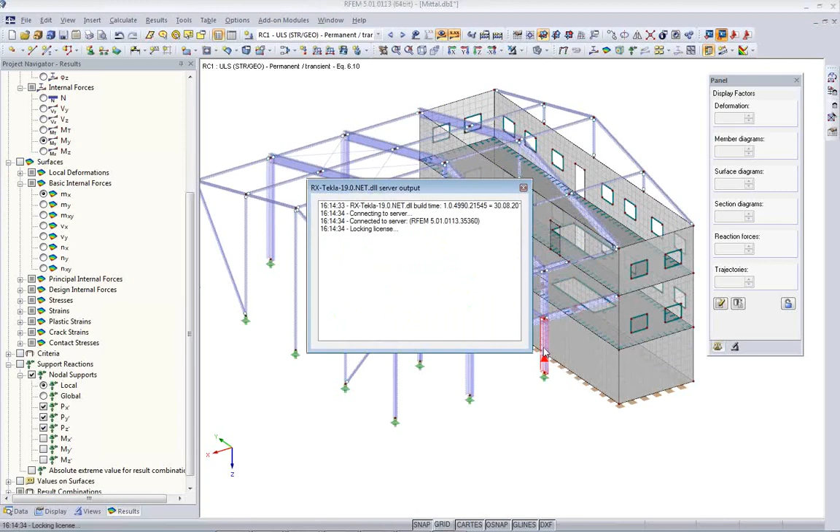So I go to Tekla Structures. The model is here. I've pointed out the connections. We go to RFEM and we say update existing model. So we update the existing model. We also export the internal forces, and we click OK, and then we go to Tekla Structures and see what happens. After a certain time, we get the updated model.

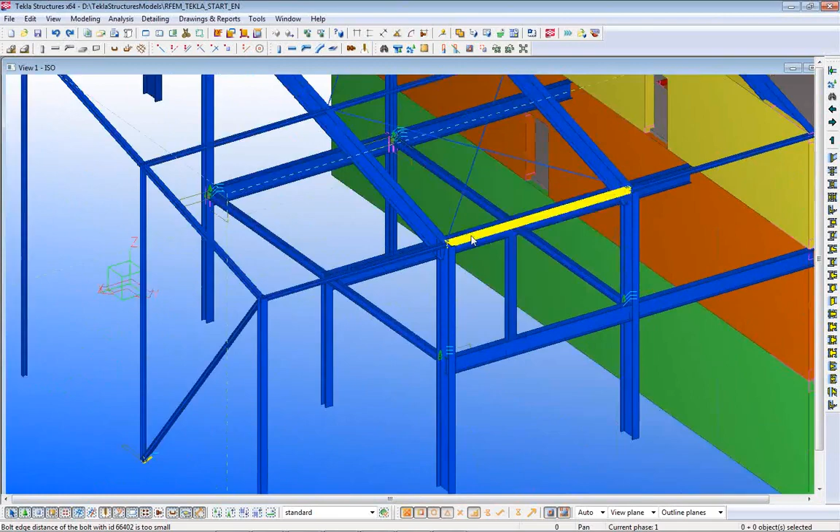We see now we have the bracings. We see now we have the changed cross sections. We have also the updated internal forces. Now I can undo, and you see the changes. We have the columns here, redo, and see how the connections follow the changed situation. So we should also have the opening here.

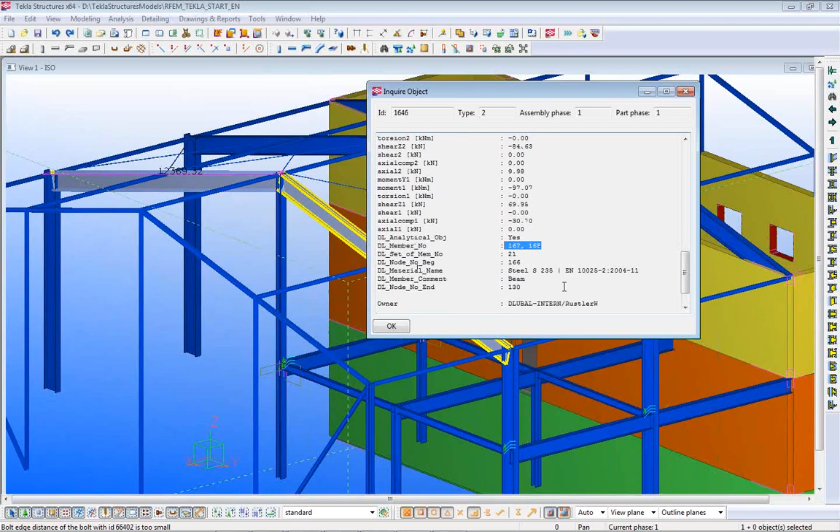Yeah, we can also check if we have internal forces. We see this part of the structure is still one part. It's not two parts like in the analytical model. I can right click on it, inquire part, and we see information from the Dlubal software. We see the internal forces, bending moment 185.55, shear, axial force. We see also the member number in the Dlubal software, material, and we can reference those objects as well.

So let's see whether we find it. 167. I go here, member number 167. Yeah, I can select it. I can say, please show me only the selection.

Show me only the selection. I want to have the results here of the internal forces: 185.55, and this should be the value here, 185.55, moment M2. So now we can use this information in a connection design, for example.

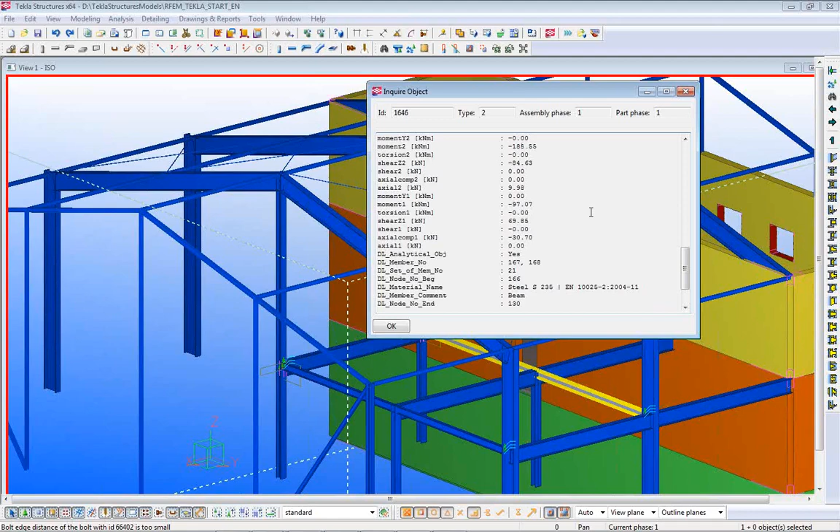This is also important to know: all the beams, for example, are still top of steel. All the work that has been done by the detailer is not lost. It's updated, and we get here the changed situations of cross sections, surfaces, openings, and so on.

This is what I wanted to show you live today inside our software and in Tekla Structures. I hope you could learn something from it and everything was interesting for you. Let me go back to the PowerPoint presentation, and I'd like to point out a few more things before we separate today. I think Robert answered quite a few questions. Maybe I should take a look at those before we do the information with the other software.

There was one question whether we can handle general sections or non-standard sections.

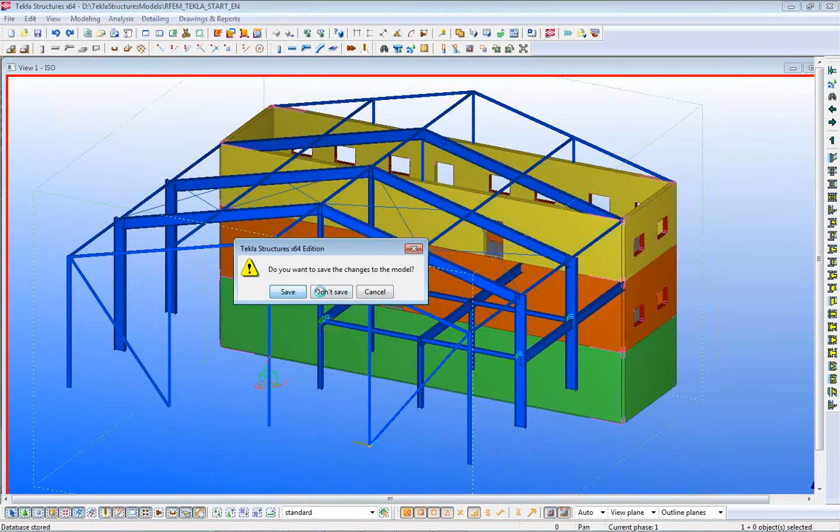This is a typical question, and it's not surprising that it comes up here as well. Here, for example, I have a few non-standard sections, like a C section, or sections with variable depth, parametric sections. I can also do things like in RFEM. I have also a typical model for it.

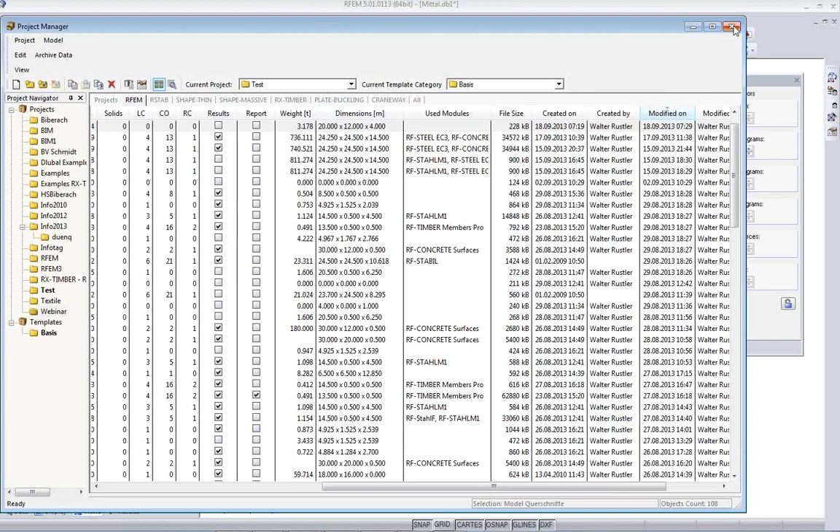I can go here in the project manager. Hang on, open it new. And we go here and find sorting models, just a second. Sections. Maybe now. Okay, where is my model?

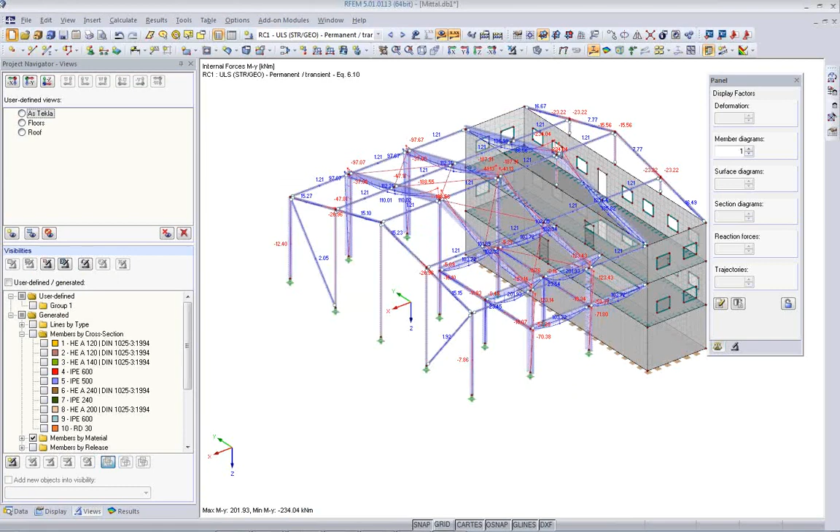Never mind, let's use just a Tekla model. We can do it that way too. I create a new file. And I import this non-standard section from Tekla, it doesn't matter, we can go this direction, into this file. Import. Analytical model, okay.

And here I have my new cross-sections. For example, there is this C shape, and there is also a boxed shape, which is called in Dlubal, for example, like this. But in Tekla, it's called differently, it's called WB 500 and so on. But we internally mapped those cross sections, and I can change it now here.

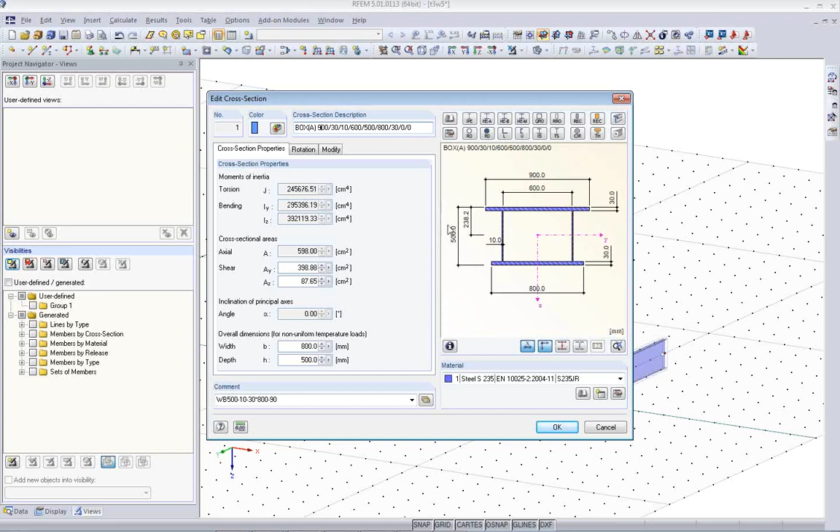For example, I go into the material library and change it here to, let's say, 900. And maybe this should be 1000, so it's wider. Where I can also change the depth of this welded section, where I go in the library.

It's better to maybe do this in the tables. Hang on, you can see it better. Cross sections. And I change it here to maybe 1200, width should be 200, and so on. I right away have all my cross section data here.

And this changed information I send to Tekla now, and I update the structure. Update existing model. I look into Tekla, and everything is updated now. I have here 1200, and this parametric section is also updated.

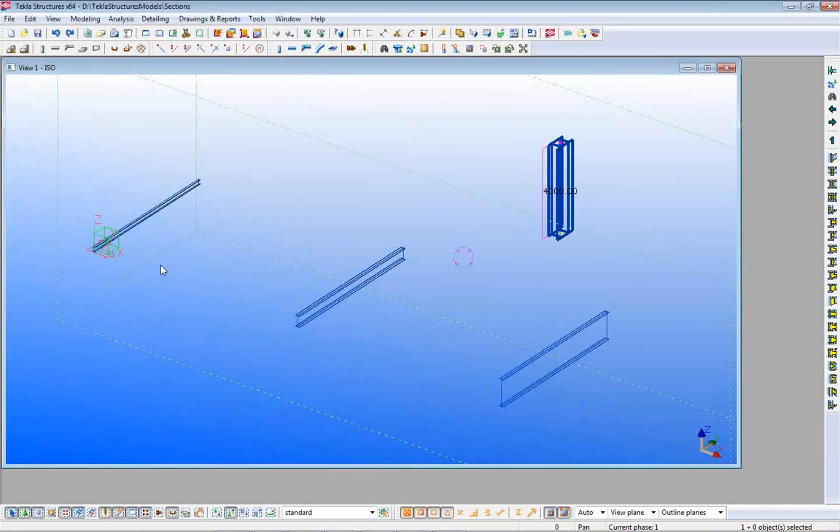One more word on this C section. In the import detailed settings that I showed you at the beginning, you can see the mapping file for materials, but also for cross sections. Here I have this cross section: in Dlubal, it's called KC200 by 2.5, provided by Starbar, and I map it this way. So in this way I can map any cross section I like, and you can very comfortably work with this import/export to Excel options to create such mapping files. Standard cross sections are mapped by default with the software, and others can be handled with the mapping file.

The question was if we can import and export IFC files. I can show you this as well. IFC is supported here: import industry foundation classes, IFC. We support the structural analysis view and the IFC coordination view.

It is important to know the difference. The analytical view includes representation of nodes at beginning and end, and supports, releases and loads, while the architectural view, which is mainly used also by Tekla and by other BIM software, includes basically a 3D or solid representation of all the parts and objects.

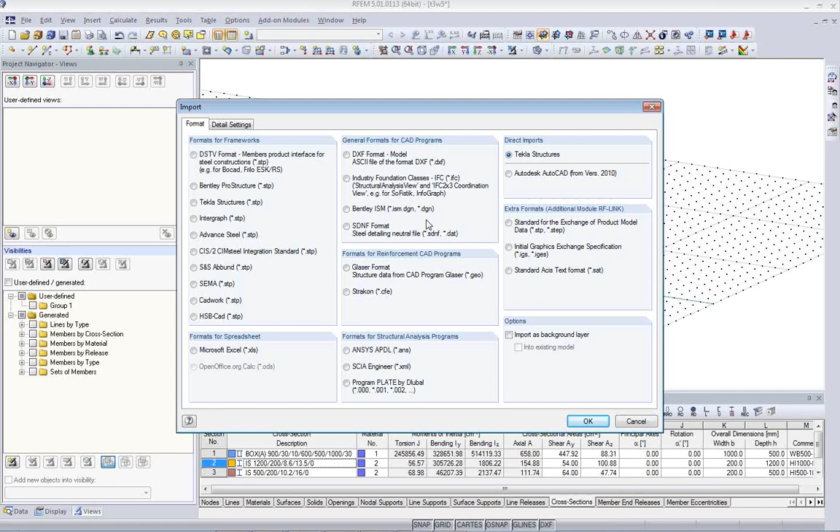Can I use springs as a release in Tekla? As I said, in Tekla you need to have an analysis model. You can set up releases here and also spring constants - they can be, for example, a spring. And if you have this spring constant, we also import this spring constant inside our analytical model.

Then there was the question again, can I export a model from Dlubal to Tekla? Yes, we always write the physical model, so we're not writing the analytical bar model, but we write the physical model. Maybe I can create a new model or open an existing model here, an empty model that I can use to export something into it.

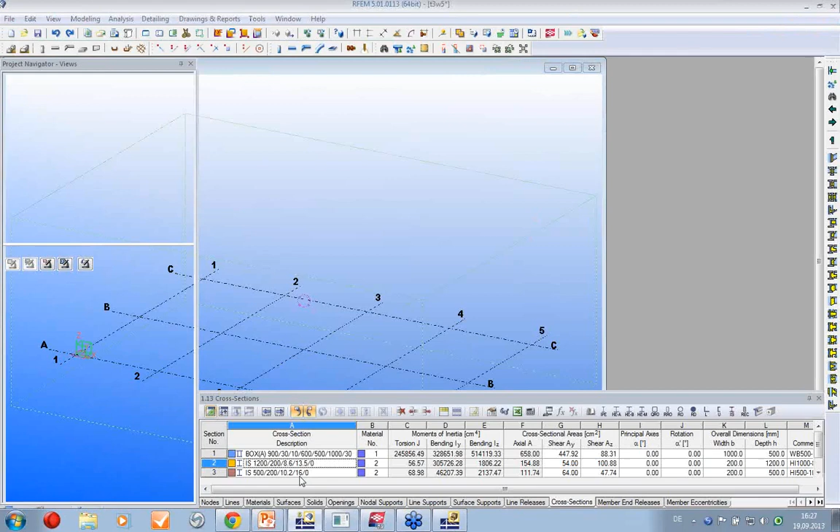Let's see what I have here. We can, for example, use something like this. This is a real project from a customer of ours who did some analysis of a multi-story building, and we can export this to Tekla Structures - export, update existing, or overwrite in this case.

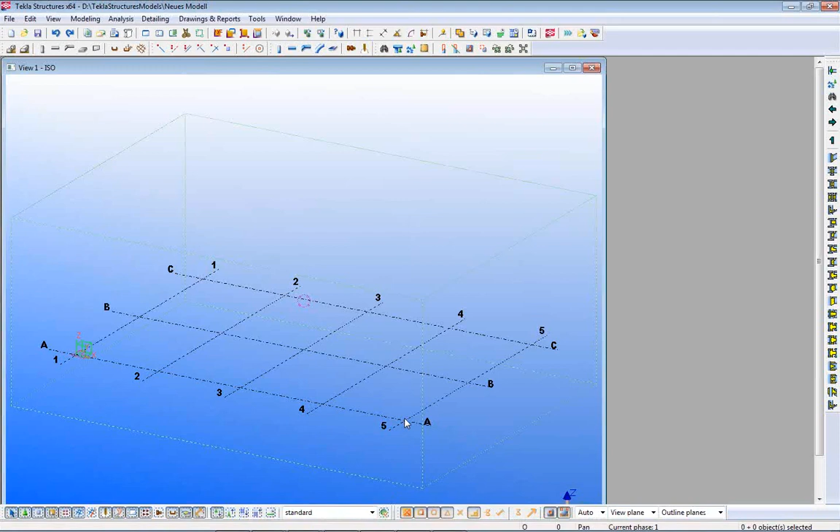Okay, we have no results, so after a while we should see the model showing up here. It's built up here, and we have here the 3D model, and Tekla users can use it and work with it as well.